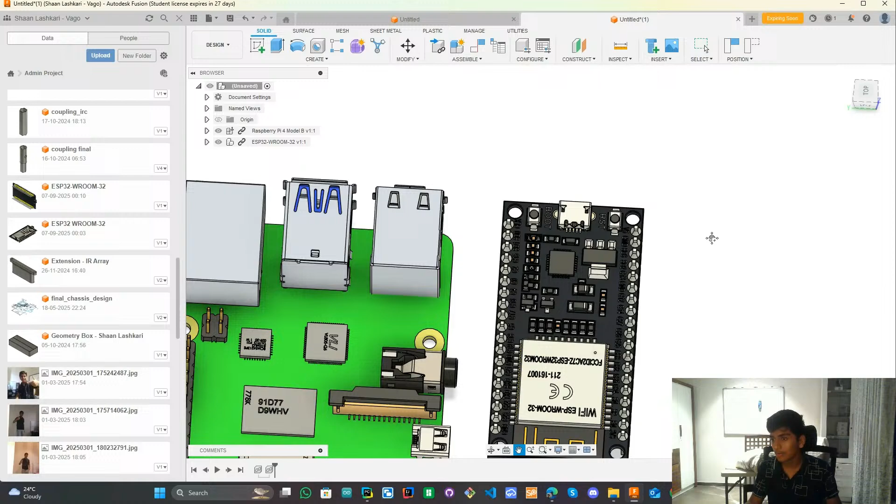Okay, let's come to work now. It's the work task we are thinking about. I'm making a chassis which has a lot of stuff on it, especially the ESP and the Raspberry Pi. It is together, and it's a lot of stuff. If I can zoom on my camera, it would be a great privilege. Let me see if I can zoom on my camera. I can zoom on my camera, can I?

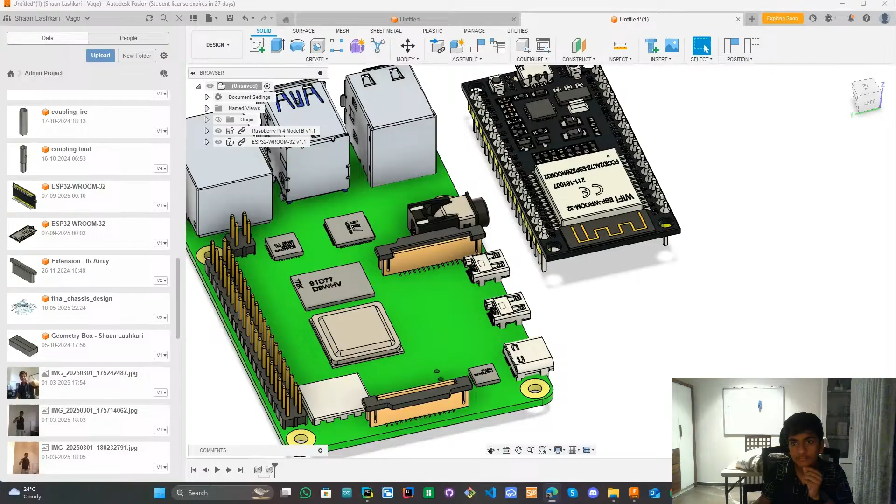It's just being... okay, there is no one yet. How do I explain that this work is all real? If I can show my board somehow, I need to put on the camera application and put on the zooming stuff.

Okay, I can zoom in on the camera. Yes, I can zoom in on the camera. So I can show the whiteboard now what I'm thinking of. My ideas are super realistic and they need to be moderated in amounts so that it is all perfectly visualized and easy to understand.

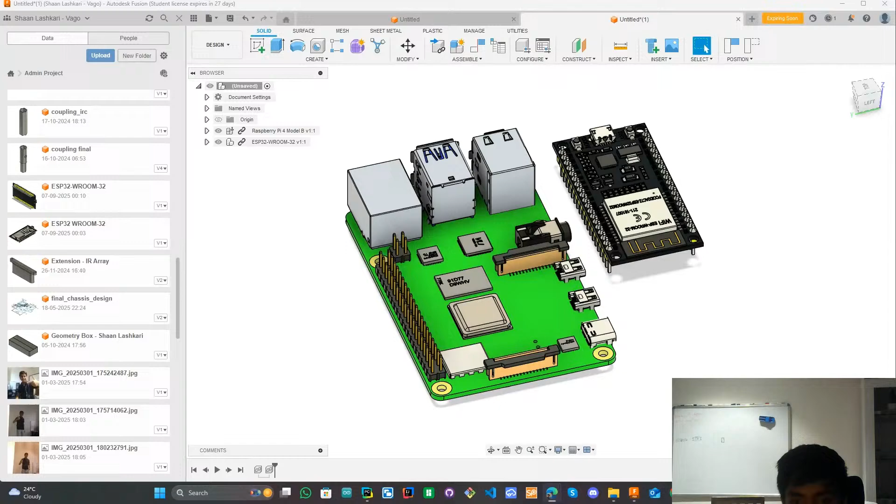So currently, what I think is that my chassis is supposed to have some components compulsorily: a Raspberry Pi, an ESP32 with a black marker, and we need the main part as ESP32. We have a lot of sensors on our chassis, we have a lot of stuff also. It's quite difficult to put it all in one place. So as per I planned, let me tell you the game plan, the actual plan using is to actually execute everything. So I put my camera normal now. Just a second, guys. Yeah, done.

So as per my plan, we are making an autonomous vehicle. I'll show the process: it needs computer vision features which we'll get from the Raspberry Pi. It will process computer vision MediaPipe on itself so that we can run it, execute the program. We don't need any external interference, it's just the device itself.

We need real time decision making, which uses serial communication between Python and the COM port of Arduino, but we'll be using ESP for that matter. And we also need machine learning for identifying objects. Actually, a task list, I'll just show you the task list. It's a quite difficult one given by great people.

We need to follow the line. Okay, it can be very unnatural, it can be very unpredictable how the line will actually be. It can be just black and white strips, as they say, two parallel black lines, and crossing the lane will be a negative marking. So either we'll use the IR method or we'll use the OpenCV method of detecting lanes and calculating the turn accordingly. But I think we should be using the IR sensors, but we don't know the actual distance between the lanes, and that's a big question.

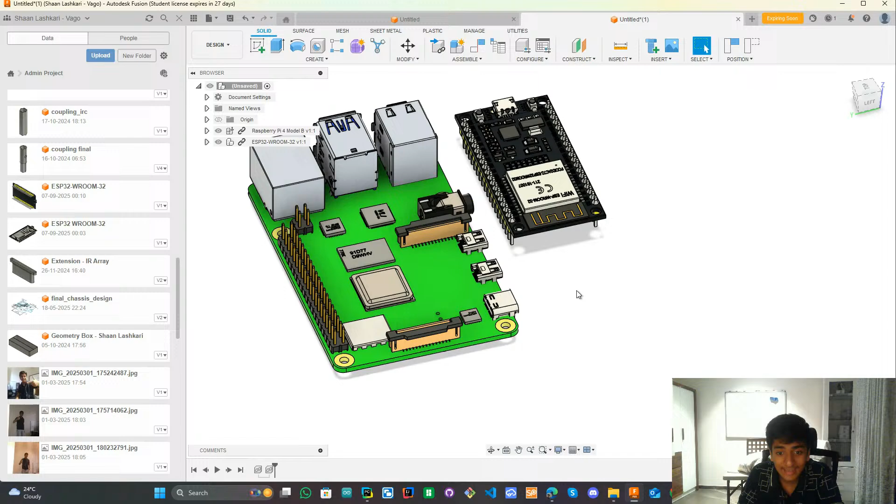We need to complete this task of designing, and this is not easy. I need to make a rough box on Paint, on MS Paint, because before making a rough idea of what's actually happening, we cannot continue further. So what I'm saying is that it's not quite easy enough to figure how many components and what all and where we do. That's a different story all by itself. So once you realize that everything is a separate story for itself - you have so many components and where to place what - it's very clueless stuff, okay, you will be completely mad. It's just, my god, how is it possible?

Let's come back on track. So, as I was saying, yeah, so we got three viewers on our stream right now, it's quite happy moment of my life. Let me open YouTube and see if I'm being in the recommendation list of live streams on sports. Unfortunately, it's just sports which is being promoted widespread. No one promotes robotics nowadays, it's not that famous now, I don't know why it's not, it's just there because it's there. And also, if I cross 10 views it will be great, and it is very good. Unfortunately, we don't have much of views and we don't have much of following on our YouTube as well, so we are not in the list of recommendations.

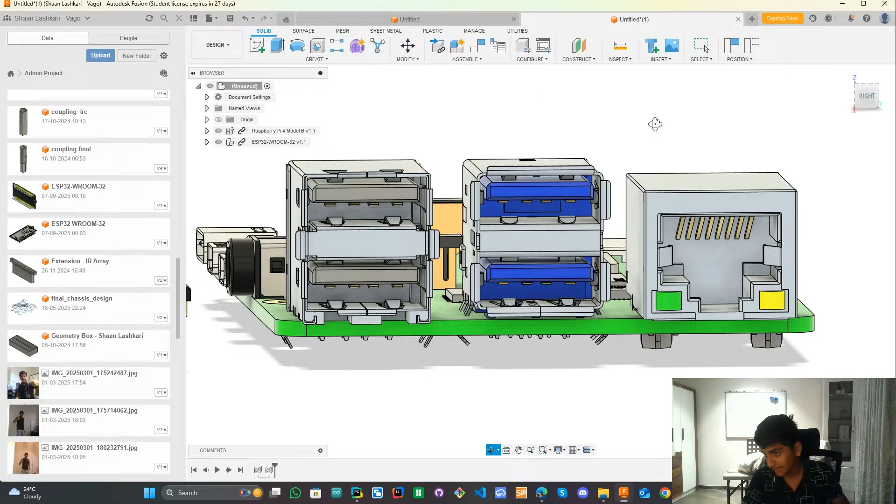I believe we should use a USB camera because Raspberry Pi is there and we have the advantage of using a USB camera. It has so many USB ports. I'll show you once, we can utilize any of these. Apparently we have only four USB ports and one Ethernet port and two of these ports for display. Might be for USB as well, but let's not take it for granted.

One thing is sure, we are using that space for camera, and we have ultrasonic sensor for distance management, how much distance it is. Especially with the parking assist, we have to park the vehicle as per their recommendation. We have to park it as well - reverse parking assist.

Basically, it goes like this: it turns and it parks like a reverse car. That's why we are using mecanum wheels. It will help us so much in turning, in parking, in gliding away. It's very easy to use mecanum wheels, and locomotion is quite easy. So apparently, it's a good option.

Anyways, we have to do the reverse parking assist as well. It's a big task, we need to use a lot of sensors. It should enter a designated parking zone using reverse motion. Now, because we have no idea what's happening, no idea about the arena, no idea about anything, it's just a rough idea, and we have to submit an ideation document. So I will most probably make it as an ideation itself and not too complicated to analyze. Let's simply put a couple of ultrasonic sensors with the color blue on the front.

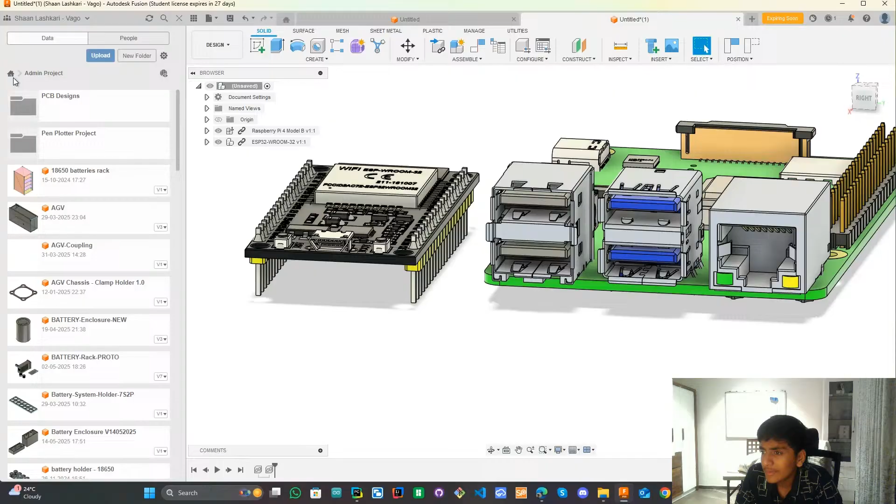I actually designed the robotic arm myself. I have the design as well. It is a very messy design to be honest, but it's bearable. I had tried my best to make a professional robotic arm, and it was a quite successful attempt.

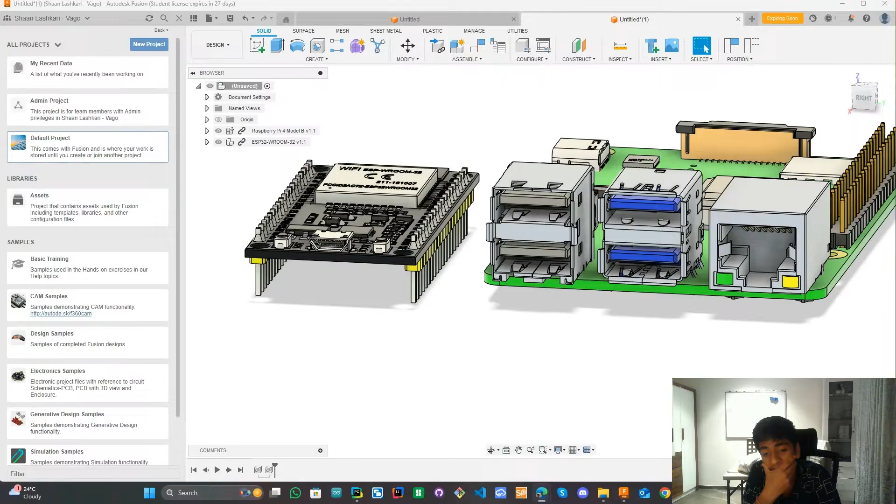So I think it's 1 or 4 a.m., I need to sleep now. I'm sleep deprived for real. I need to sleep, I'll just take some more time and then go to sleep. I cannot bear it anymore. I'm literally alive on coffee. I just drank some cappuccino 5, 6 hours ago. Cappuccino is very strong, it makes me strong. Cappuccino works really nice, it has some hidden strength. Oh my god, hand. Anyways,

Let's come back on topic. So the gesture control stuff I had done, I used MediaPipe for that. It is quite good. Lovely.

We were missing something, and I was talking about that. Right, okay, motor drivers. So servo motors don't need a specific driver. They need digital input, they have inbuilt microcontrollers to decode your digital inputs. How do I explain this? They have PWM pins, they get the pulse width modulation input, they decode the input itself, and basically you get a high voltage power with high current.

Servo motors don't need high voltages, they can burst. Just give them sufficient current, okay? Because under heavy load they cannot work, the motors get burnt or the gears get flared out because of so much forceful rotation from the motor's force. It's a lot of complications. If you have a metal servo, that's a good benefit, that's what I want to say.

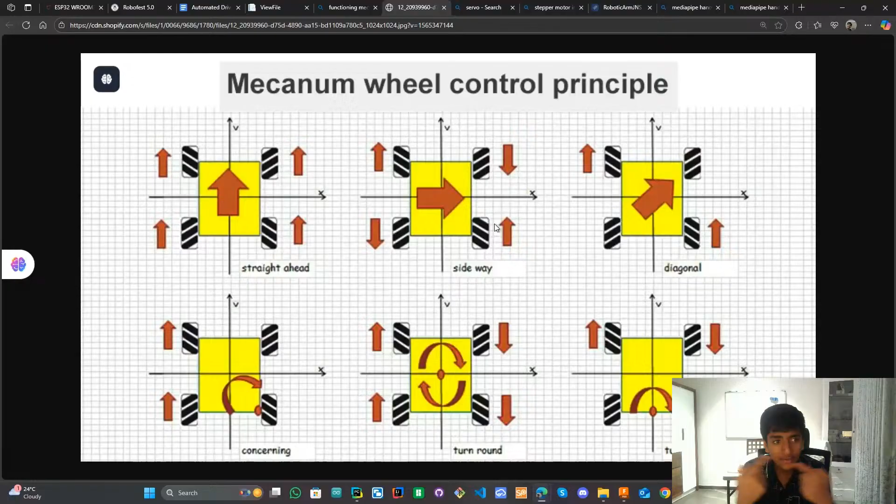Right, so once you understand the vectors of forces, how to move it diagonally, how to move it parallelly like this, how to move it front, back, left, right, turning, you understand the dynamics of vectors. It's physics, it's basic physics. Because the wheels are very efficiently and smartly pointed at 45 degrees, they can make vectors, they can cancel out each other's forces. It's very beautiful, it's wow, it's just crazy, whatever it is.

So I was thinking to use Mecanum wheels because they have smartness in them. They're not dumb wheels like simple wheels that just move forward and backward. They have smartness, they have 45-degree vectors, they can cancel forces, as I already said.

It's easy to use, well, not easy to use, but it is efficient. Not even efficient, it's crazy to use. Okay, they have friction, they have a lot of rubbing against each other, they cancel out forces, they also have loss in that. They're not efficient, cancelling out forces needs a lot of effort. This is pulling that side, this is pulling that side, you need to cancel out, they are pulling each other so that it moves ahead. It's not easy, okay, so you use some energy over there as well. It's nothing as efficient as it could be, but the Mecanum wheel is quite smart.

Encoder motors are very expensive. I had an expense of 10,000 rupees on two encoder motors and two drivers. It costed me 10,000 rupees, and it's never retiring. I'm never going to buy such a motor again because it's a headache. I've sent it for repair at least 20 times in the last year. I bought it last December, so it's been 9 or 10 months, and I've sent it to Robotics' own office for repair 20 times at least. That's their condition, and it's actually partly my fault.

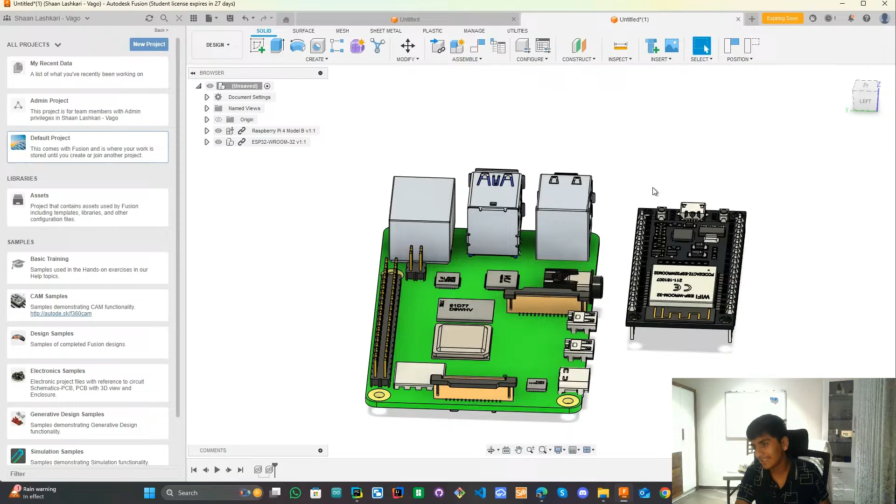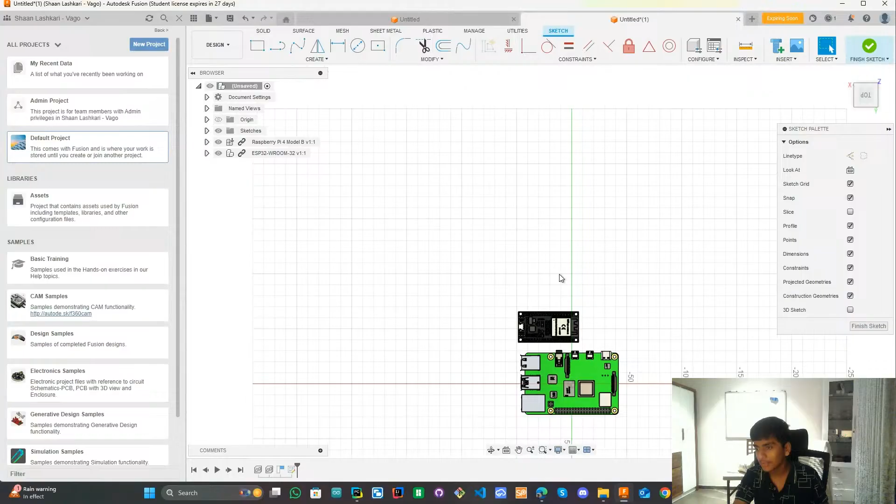Currently I am stuck at this position, I don't know what to do after this. I just got these designs placed somewhere randomly, I have no idea what to do with this. You could design some part of it, though not everything. Like if you design a sketch on the floor, this axis I'm talking about has a capturing position, and you have some idea about what you're going to make. We've got the restrictions or dimensions of the robot - let's go with the max limits, because it's easier to not think of everything. Go with the max limits.

We have specifications: 18 by 20, width by length is 18 by 20. We can follow 17 by 19. So I'll take a rectangle from the center. I believe it should be very beautifully designed, but okay.

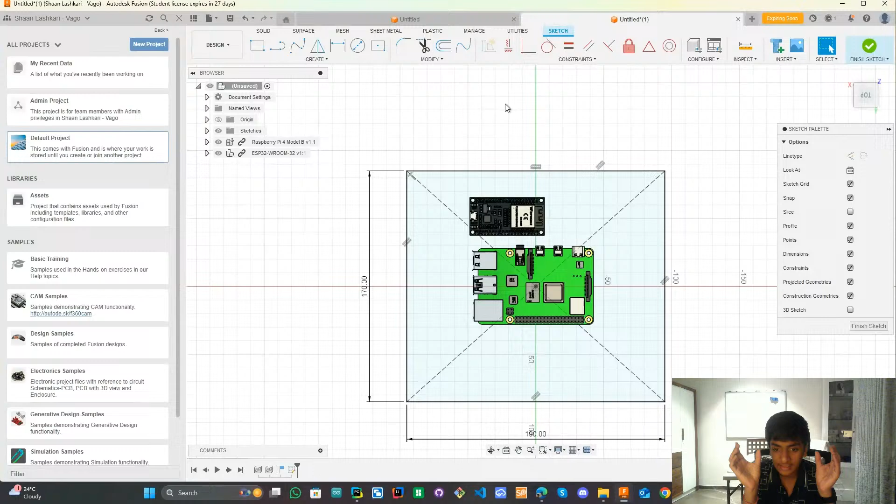So we have this arena, this chassis space in which we have to place everything with the Mecanum wheels. We cannot put the Mecanum wheels in the space because you need at least 3 to 4 centimeters of gap on either side. If you cut 190 by 60, which gives you 130, that gives you an even smaller chassis.

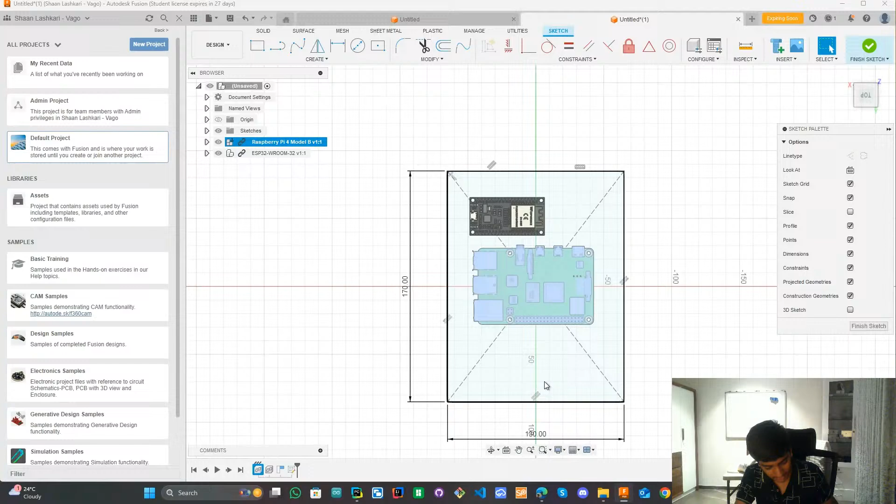So after cutting out the Mecanum wheel part, there's not even some space left for anything else. So my decision is to move the Raspberry Pi. I'll finish the sketch and show it. What I believe is that I need to move this thing above.

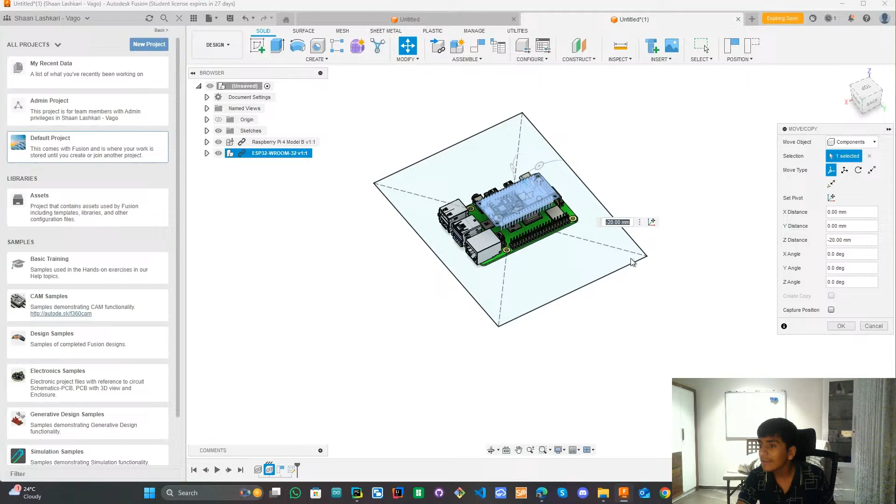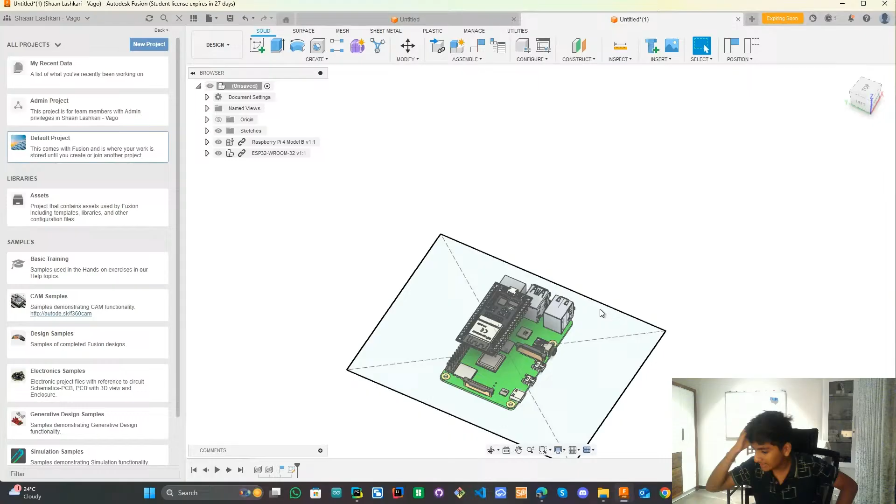My Raspberry Pi. I'm not in disbelief, but sometimes stuff gets too disoriented. Because if I don't do this now, I'll tell you what happens - I won't have space for anything left. So I'll stack them above each other. That's my concept. I'm going to put the MCU in one single unit, or even put the whole Raspberry Pi in a slanting position, and complete the stuff. So I'll just write down what I need to do tomorrow morning as soon as I wake up, because we need a lot to work.

So the current design we have is that I just have a rough understanding of what's actually happening.

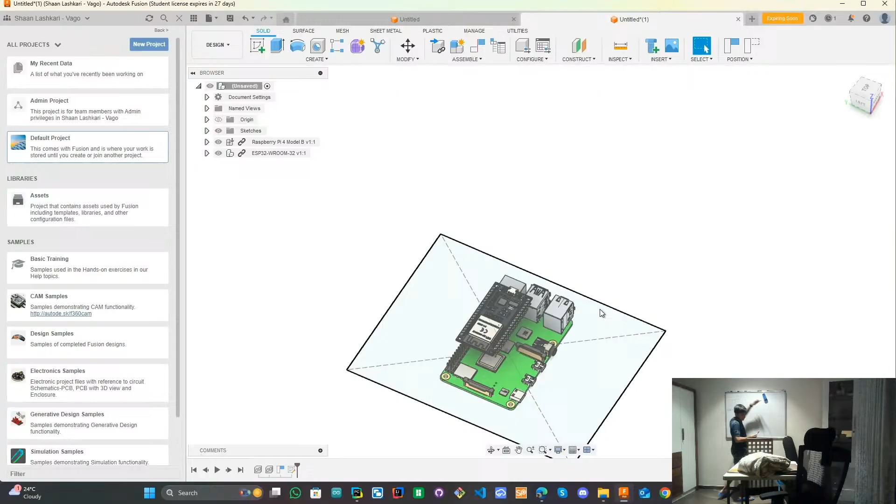Right, I have the red marker now. I'm going to draw this rough design on my board for tomorrow morning to realize what actually I did yesterday night, or today night. There's not even some time left.

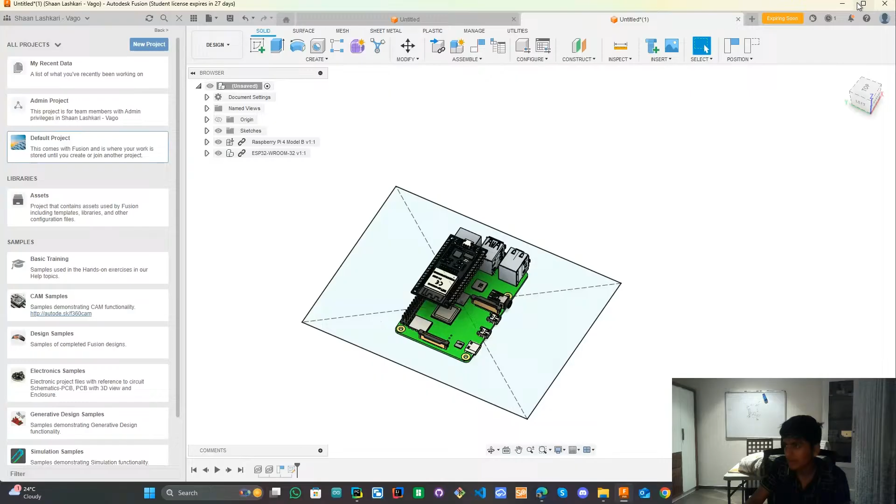Let's come back on track. So for today, I guess the Mecanum wheel is decided. We have decided a lot of things, but I'm not done with designing it yet. Let me just gather all the components required and arrange it tomorrow morning. I'll get the Mecanum wheel from here. I just need a Mecanum wheel.

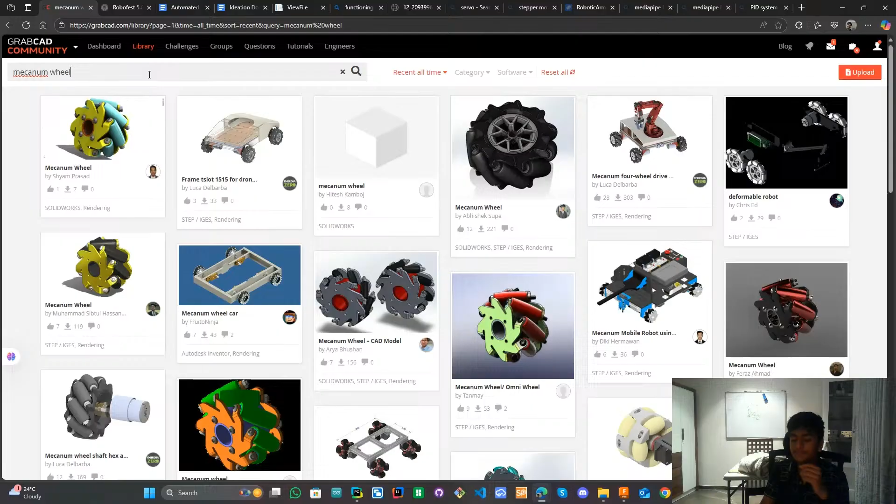We need a 50, 60, 70, or 80 maximum—max to max we need an 80 Mecanum wheel. Let's see this design. It's not bad, okay, it is perfect. By the way, it is perfect. So I can use these Mecanum wheels in my robot.

I can implement a lot of stuff, by the way. So for now, let me stop sharing. Let me sleep and get back into form tomorrow morning, and I'll continue with that stuff.

If you can see what's happening on the board, I don't know what to do with this lighting stuff. It's just too crazy, man. I stopped sharing my screen.